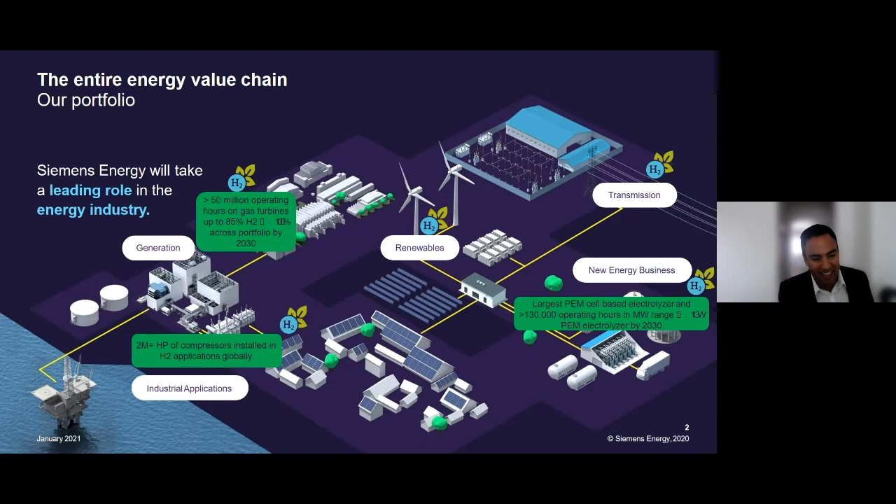If we go to the next slide, please. So just a glimpse. I know this was originally supposed to be in the production session, so I got shifted, and that's why I included this slide. Nevertheless, just to give an overall perspective of our electrolyzer portfolio, because a lot of people still don't associate Siemens with hydrogen as such. Siemens started the electrolyzer business in 2011 at lab scale, and quickly we scaled up in 2015 to over 1 megawatt. Our latest generation, the so-called Silyzer 300 electrolyzer, is roughly in the 17.5 megawatt range. For reference, this electrolyzer can produce about 340 kilograms an hour. So it's a substantial size already.

But being a large energy company and having renewables and grid integration in mind, the early ambition was to scale up our portfolio towards 1 gigawatt. And that's also very crucial. I think we heard it from previous speakers: when we talk about cost reduction, we also need to consider scale. So that's why we have a roadmap in place now. Our next generation is under development, hopefully soon reaching 100 megawatts, and then beyond; by the end of the decade, we are striving to reach the gigawatt limit. Next slide, please.

Now, as I've sort of shown before, we as a company are kind of scattered around the entire value chain in terms of hydrogen. And thus, we are also now in a position to be a full turnkey provider in terms of hydrogen solutions. That really starts from the planning and consulting phase, transferring the existing capacities and competencies we built up in project execution when we talk about large combined cycle power plants, for instance.

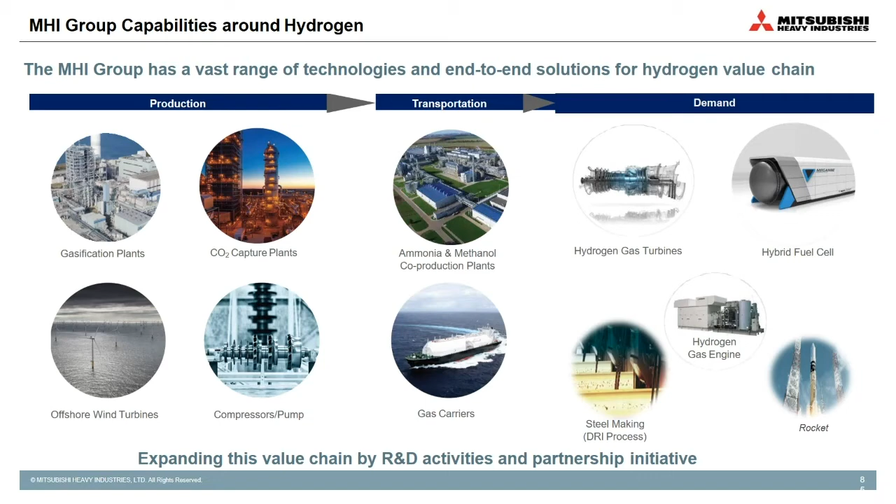All right. Among those solutions across the hydrogen value chain, today's session is focusing on power generation and production. I'm going to introduce the power generation solutions we offer. This slide shows a hydrogen gas turbine. Mitsubishi Power, a 100% subsidiary of Mitsubishi Heavy Industries, has hydrogen gas turbines, which are characterized by the ability to reduce investment costs by converting existing power generation facilities that use conventional natural gas-fired gas turbines to hydrogen burning with minimal modification.

In addition to that, hydrogen can be used in the large-capacity gas turbines which our group has been good at, stimulating large-scale hydrogen demand ranging all the way from 40 megawatt to 430 megawatt scale with heavy-duty gas turbines. We already achieved 30% hydrogen co-firing in a large-scale advanced gas turbine in 2018, and we are proceeding with technological development in preparation for 100% firing in 2025.

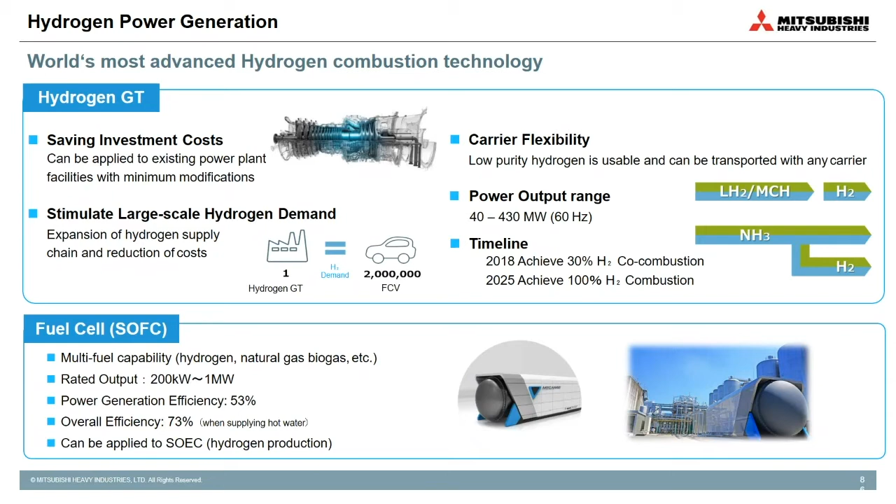In addition to gas turbines, there is also the fuel cell, which is highly efficient and can be used with multiple fuels, such as hydrogen, natural gas, and biogas. We have built up a track record mainly in Japan, but recently we are expanding orders outside Japan. As for fuel cells, the technology could be applied to solid oxide electrolysis cells, which can produce hydrogen as well. Can you go to the next slide?

Okay. We have been actively developing and announcing flagship, actual utility-scale projects in the United States, Europe, and the Asia Pacific. Especially in the United States, in the H2@Scale project in Texas, we are providing renewable power and operational data from the wind turbines in West Texas, which we own and operate. We are working with Frontier Energy and UT Austin to evaluate the feasibility of green hydrogen here in Texas.

In addition to that, in the state of Utah, we are developing a business that aims to produce and store grid-scale hydrogen for use as fuel in the hydrogen gas turbine supplied by Mitsubishi Power, collaborating with Magnum, who is storing hydrogen gas in salt caverns. Intermountain Power Agency gave us an order for the advanced-class gas turbine for the utility-scale project, and it shows the path to 100% renewable power no later than 2045.

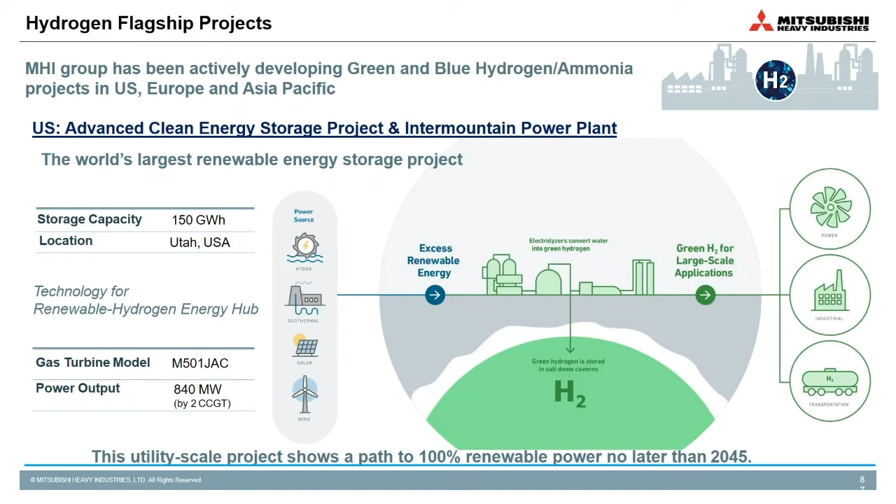Thank you very much. Great, thank you so much, Ricky. Next up is Ed Young from Toyota. Ed, can we move to the next slide to get Ed started? We will wait for Ed to join, and while we wait, we are actually pretty close to the close of the session anyway, but if Ed can join, we'll get his remarks.

But I do have some questions both for Ricky as well as for Nakul, and these are kind of similar, but let me begin by asking a question first to Nakul.

It was really fascinating, Nakul, as you showed Silyzer generations and the scale, right? You mentioned every 4 or 5 years, like 10 times increase in scale. In research, I study intergenerational technology learning curves, and how do you go from here to there in terms of scale. What are those challenges and management opportunities you see within Siemens to really make sure as you scale up? Are we talking about really just taking what you have and making it bigger, which I don't think is the case?

Right, we have a lot of history in other technologies where as you scale up, and especially as you scale up rapidly, and if there's not enough learning between generations of technologies, later on you run into all sorts of complexity. So tell us, how do you all think about that, and what types of operations and management opportunities and challenges that poses?

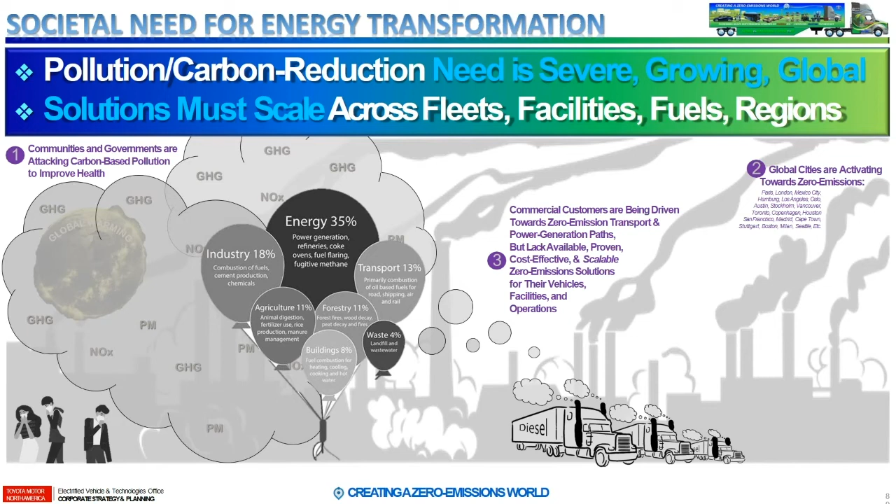So next slide, moving to slide number 3. I'm going to skip number 3, just given the time constraints. Moving to slide number 4. So slide number 4 essentially is our vehicle electrification plan. Given our understanding of consumers and their various needs, we are taking a portfolio approach that will include battery electric vehicles, hybrid electric vehicles, and fuel cell electric vehicles.

This is our vehicle electrification plan. And we are taking a portfolio approach where we, given our understanding. And moving to the next slide.

One of the more interesting things about our powertrain is really the fuel cell electric vehicles. We've sold over 6,000 fuel cell electric vehicles in California. There are now 43 hydrogen fueling stations up and running. In 2021, we anticipate another 15 to 20 stations to come online just in 2021, and then many more coming online in 2022 and through the mid-decade.

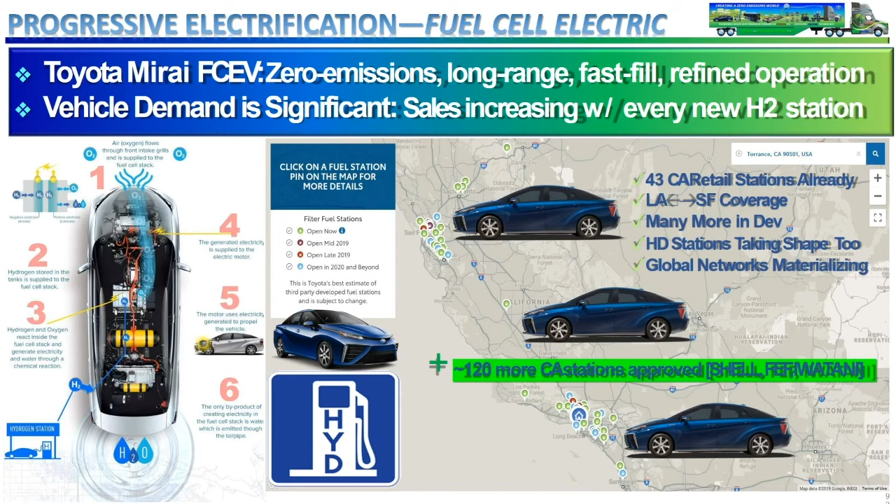Now the backbone, actually moving to the next slide. This year, right around now, we are about to launch the next generation Mirai. The new Mirai is coming. I think literally these vehicles are being taken off the ships at the Port of Los Angeles and will be hitting dealers soon. So the car will have better power, performance, efficiency. The car has been rated by the EPA at just over 400 miles of range, and has much improved dynamics and style relative to the current vehicle. So next slide.

What is really the underpinning of the powertrain is all of our experience building hybrid electric vehicles. So all the learnings from the Prius, where the Prius is essentially an internal combustion engine vehicle with battery support, we've taken those learnings and built that into the fuel cell electric vehicle, where you take a fuel cell electric powertrain, and it's essentially a hybrid vehicle that also has a moderately sized battery in it to help propel the vehicle. So because of that, the vehicle itself is extremely scalable.

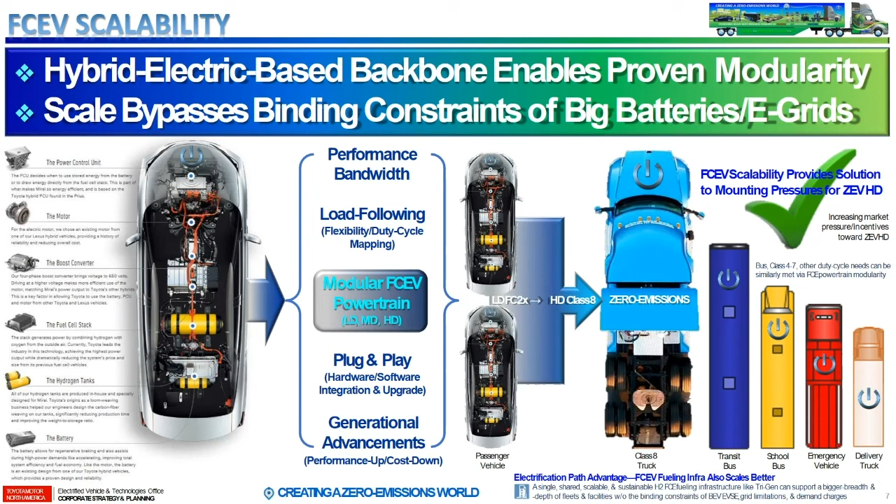And what we've essentially shown is that we took 2 Mirai fuel cell powertrains and went out and purchased a Kenworth mule and installed the powertrain into that truck along with heavier duty motors, larger capacity hydrogen tanks, and voila, we ended up with a Class 8 truck that is capable of 670 horsepower and 1,325 pound-feet of torque. So next slide.

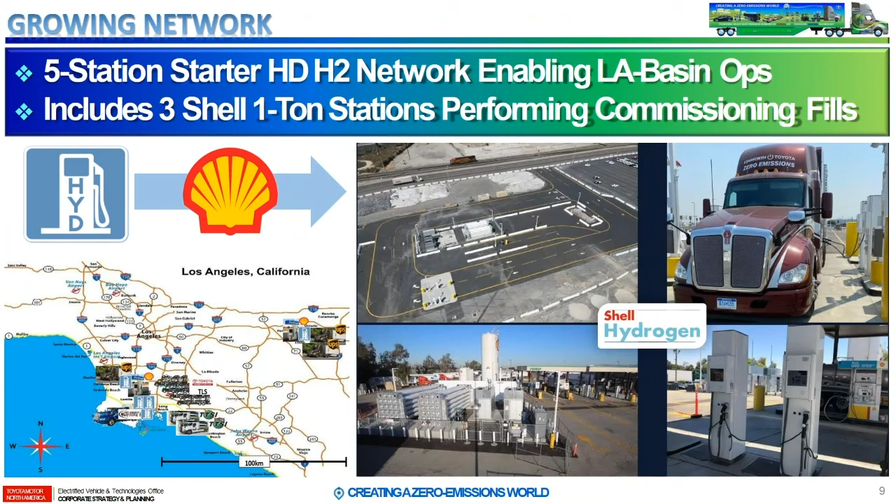And with that, we also were able to work with the Port of Los Angeles and Kenworth and UPS and Shell and others to win a grant from CARB for the creation of 10 Class 8 fuel cell electric trucks, and also 2 heavy-duty fueling stations in the Los Angeles basin. So the next slide is essentially more graphics relative to that heavy-duty project. And the next slide also shows additional applications of fuel cell electric systems that can be applied in port situations.

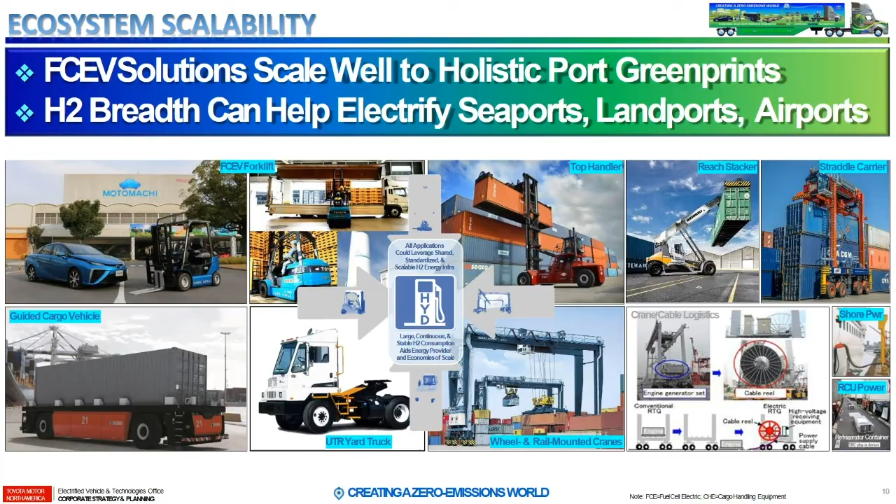So I think fuel cell electric powertrains are very applicable for situations where you have extremely high power requirements, and the vehicles that operate cannot be down for long periods of time. So given the fast fueling nature of hydrogen and fuel cells, these work vehicles are able to operate on 3 shifts, they're able to be fueled quickly, and you can tune them to very, very high power environments. And those are my slides. I apologize for the technical glitches, but hopefully people were able to follow along.

Great. Thank you so much, Ed. We're glad that we were able to get your comments. In the interest of time, I'll pose a very quick question to Ricky if you're still online. Ricky, are you on? Yes, I am.

Okay, so I really found it very interesting when you mentioned that currently you have a 30% hydrogen turbine, and within 5 years you're looking to go to 100%. Is it a linear path for you? Are some fundamental changes required to do that? Sounds like you all are very confident about the pathway, but it certainly looks potentially very dramatic. So what's entailed going from 30% to 100% hydrogen combustion?

Sure. Yeah, it is a linear development, definitely, because we have been accumulating operational hours with rich hydrogen gas firing for decades by using coal gasification, IGCC, and other applications. So it is going very well, and we are very confident to achieve 100% in the next couple of years.